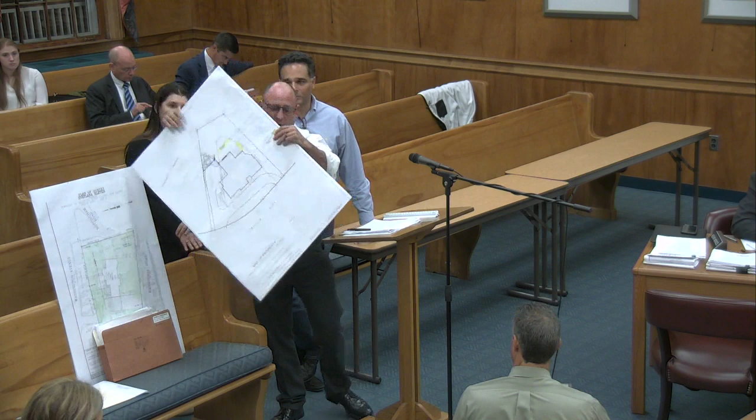So what's the project? Currently, there's a 1,255 square foot deck on the rear of the property. I'll mark these as exhibits, let's just get into it. These are photographs that I took, they accurately depict the site as they are today. Mark it A1. Oh, no Dan, we need your qualifications first. Okay, yeah, sorry.

I'm a licensed architect in the state of New Jersey. I was licensed in 2001, and my license is current and in good effect. I practice residential architecture primarily in Essex County, and I've appeared before this board.

Have you appeared before any other boards? Yes, Union and Essex County. Is your license in good standing? Still good. Your qualifications as an architect are accepted by this board.

So the photo with the tax map is going to be A1 - yeah, this is a Zillow map, but we'll go A1. That's a Zillow map, that's not the tax map? No, I have a tax map, but that's Zillow.

So what are we looking at? Basically, we have a 1,200 square foot deck that we want to take down and make smaller, about 900 square feet - over 300 square feet less than exists - but we want to make it a raised patio. Then underneath the patio, we want garages, because it's a good use of space. Given the topography of the site, he currently has 2 garages under the house, so this will create a 3rd garage under the patio.

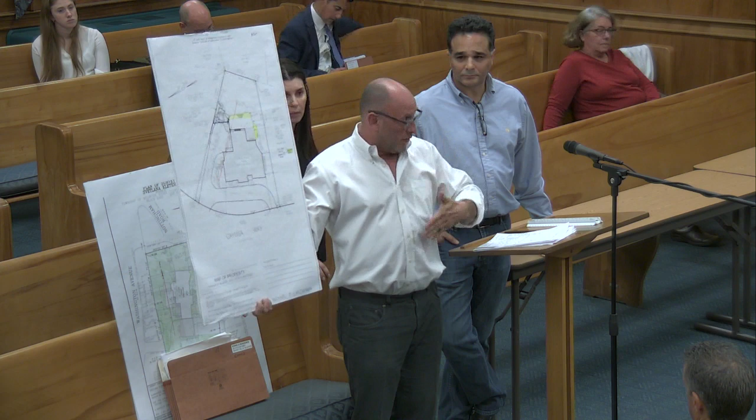First one is for a side-facing garage setback. In the R4 zone, they require 28 feet from the property line to the face of the garage. But because of the shape of the property line, we're 24.6 feet away. If you draw a line from the corner perpendicular to the lot line, that's 24.6 feet. If you draw a line straight across, which is not how we measure it, that's 28 feet. And of course, the garage doors are on the corner.

I calculated that if we were 3 feet from the corner, and I draw this horizontal line, we're at 30 feet, so we're not concerned. Obviously we're creating a third-car garage, not the primary garage, so if it's a little awkward to get to, they're comfortable with that. So that's the first variance, and it's a violation of 3.35 feet.

Combined side yard setback - I have a purple line here that shows the combined side yard setback, which is a function of the width of the property. So we're a bit penalized because of the shape of the lot. It's existing non-conforming. Existing is 32.8%, you need 35%. So that's existing, and proposed is 29.8. Obviously it's a function of the shape of the property.

Third variance, rear yard. Why is that variance increasing? It's increasing - well, it's existing, but it's an accessory structure. Now that I make it a building, it becomes a principal building. So yes, but we didn't push it any closer.

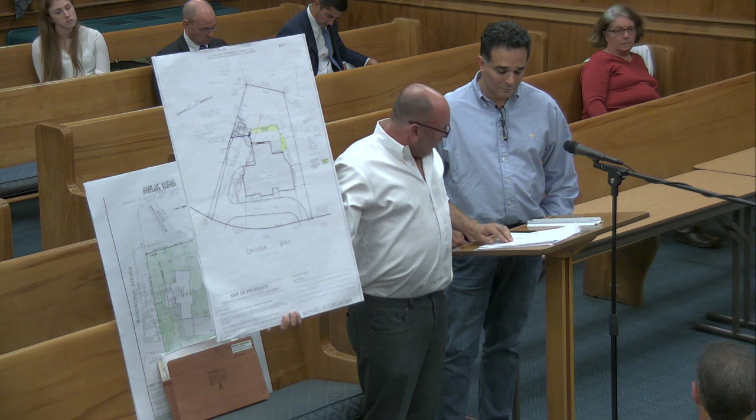Fourth variance, building coverage. The house is existing at 20%, your max allowed is 14%. The existing house is at 20, we're proposing 23.8%. It's 2,000 square feet over what's allowed. So when you look at the deviation, it's scary - it's 70% deviation, but the house is already at almost 46% deviation. We're adding about 650 square feet of building coverage.

But you won't see it, you won't feel it, there's so many positives about this, and we haven't talked yet about the architecture. There's no attic, so the storage would be great. Obviously, it's a third car garage, amazing. But the net result is so much nicer and better for the Daniels, better for the neighborhood. That's a big number if you just stare at the percentages, but if you look at the overall effect, it's a benefit in my mind.

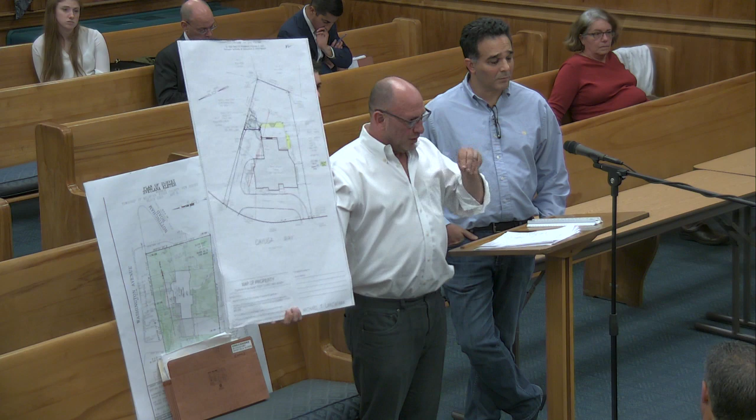You'll see some of the building coverage in the one-story addition. That doesn't change, because if I build underneath it, it's building coverage. So the only difference would be if I get the FAR on top of it, because the deck wraps around the house.

And thought this - oh, I apologize, there's already, underneath this deck, already a garage. So it's already being counted as building. Oh okay, I forgot that.

Fifth variance, lot coverage. We're existing non-conforming, you're supposed to be at 35%. The existing house is at 53.6. As a result of approval, we'd be lowering the lot coverage - we'd be lowering it 350 square feet less than what exists. Still a variance, but we're making it better.

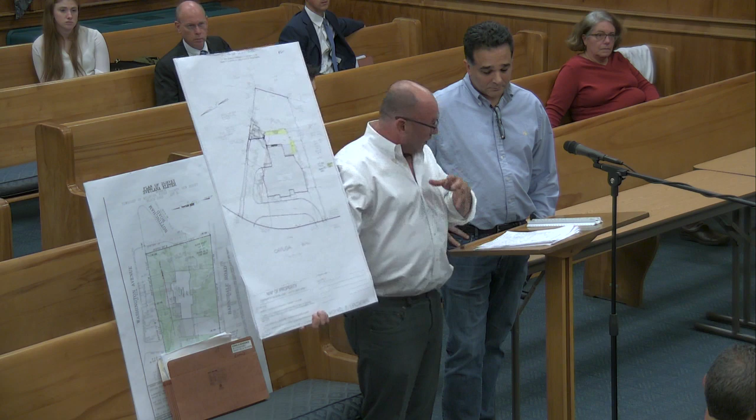So positive. And finally, FAR. If allowed to do this 15 by 17 one-story addition in the corner that sits nestled here, we'd be a 5% deviation from what's allowed. So the existing house is not conforming by 20 square feet, and we'll be seeking an additional 250. Again, there's no adjacent neighbors - it's one-story, won't block anyone's light and air space, but will allow them a little extra space in their master bedroom suite.

Those are the 6 variances. Just to recap, the shape of the lot triggers a lot of the variances, which squeezes the backyard. Aesthetically, it's going to be more compatible with the existing architecture, and I think it's going to be more pleasing, certainly for the Daniels and anybody else who has an opportunity to see this project. In terms of FAR, I think where it's placed, the massing, only the Daniels will get the benefit of it, and there'll be no detriment from that.

That's our application. Did I miss anything? What's the existing floor area ratio? Existing FAR is 26.1%, and we're proposing 27.3.

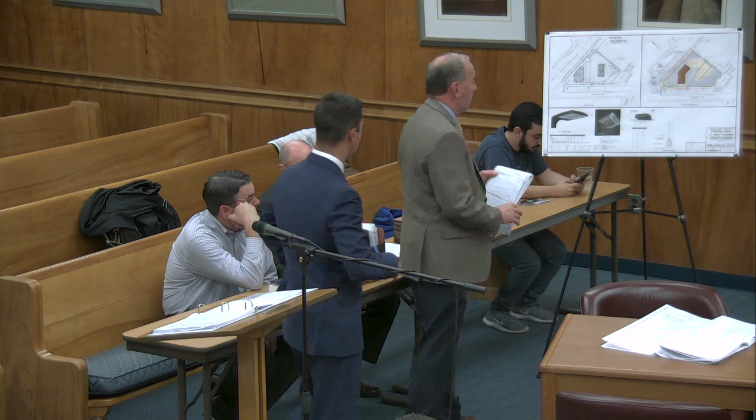Which sheet is that of yours? It's sheet 4. The reason I've taken that plan is it shows the existing survey conditions of the site. It is identical to the one we have except for its color. Fine, let's mark it A1.

Just for orientation, the existing site is located at the southeast corner of Vauxhall Road and Millburn Avenue. Vauxhall Road is running horizontal on the plan sheet, and Millburn Avenue is running diagonally toward the top right corner of the plan.

The property has been colored for identification. The existing concrete sidewalk and the concrete on the site itself is colored in beige. There are brick paver areas along the sidewalks, colored in a peach color. The dark brown is the existing Canopy gas station located on the site, which is the existing orientation of the site.

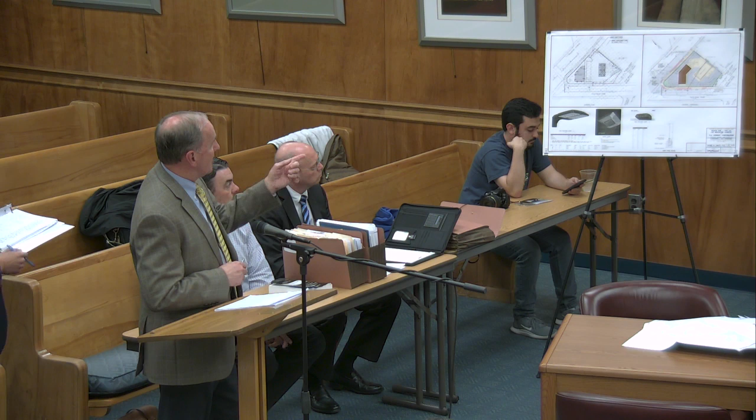The existing use of the property is a closed gas service station. The beige area in the center of the property is the foundation of the prior service station. There was a fire, I believe in November 2009, that burned the building, and the only remnant of the old building right now is the foundation which presently exists on the site.

Also, the existing canopy is irregularly shaped, but underneath that canopy are 3 fueling pumps with 6 fueling positions, so there are currently 6 fueling positions on the site. In the northeasterly corner of the site, there are 3 underground storage tanks located under a concrete pad, which are proposed to remain.

There are 2 existing driveways, one each on Vauxhall Road and Millburn Avenue, that access the existing property. The site is almost 100% paved, with existing coverage at 92.2%. There are just small islands right at the intersection of the 2 streets, plus a small green area along the brook.

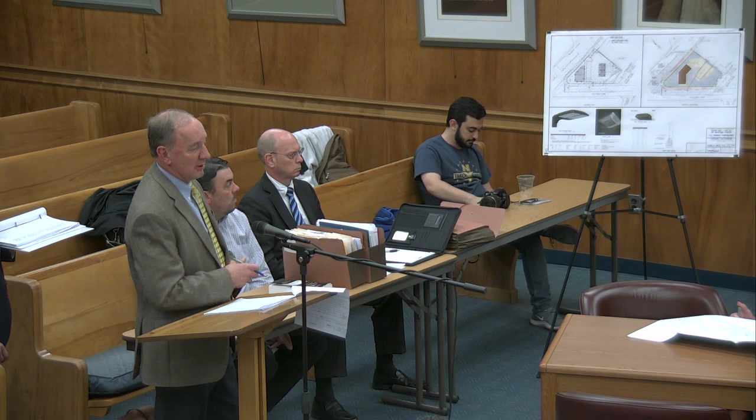This was an undeveloped site where it would be completely vegetated. That riparian buffer would be restricted from development. In this case, the riparian buffer today is almost 100% paved, with just a small strip along the banks of the brook itself. What we're going to be doing is redeveloping that riparian area, which will also require a permit from DEP.

Several things specific to this site: in July 1996, the Zoning Board of Adjustment resolution granted an auto service station, and it also determined that the site was continually used since 1930 as a service station. So we are proposing a similar use in terms of the gas station use, which would be consistent with that approval.

In 1970, there was an additional zoning board of adjustment application for the new building constructed at the site. In 1996, there was a zoning board approval for the current use of the property, even though it's closed at this point in time, which granted the use for the service station and canopies on the site.

What we're proposing to do is shown on sheet 2 of 7 of the site plans, an identical copy, except this has been colored for identification. We'll mark it as A2. This is the exact plan that's been submitted, colored for identification.

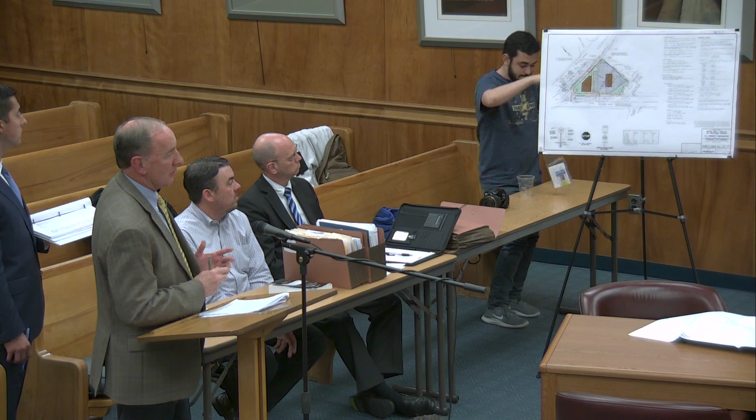This plan has the same orientation as the previous plan. Vauxhall Road runs horizontally across the middle, and Millburn Avenue is angled towards the upper right of the sheet. The proposed sidewalk areas are colored beige, and the landscape areas we're proposing are colored green or light green. The only other beige on the right-hand side of the site is the trash collection area. That's basically what's being proposed and how it's colored.

The proposed building is located at the intersection of two roads. It has a front yard setback from Vauxhall Road we're proposing of 8 feet, and a proposed front yard setback from Millburn Avenue of 8 feet as well. How many feet? 8 feet on each, 8 feet setback.

The proposed building will have a square footage of 1,820 square feet, and it will be 1 story in height. The elevation of the building, because of the flood hazard area, is going to be located above the flood hazard elevation itself. The whole building will be elevated.

It'll be built on piers, and it'll allow the floodwaters to flow under the building. Once you hear from the architect, he'll describe how he's putting screening around the building to give it the appearance that it's one continuous structure built to the ground level, but it's designed in a fashion to allow floodwaters to flow underneath the building itself.

The access to the site is going to be from a single driveway on Vauxhall Road and a single driveway from Millburn Avenue. The driveways in both locations are as far from the intersection as we possibly can create on the site, and they're both dual entrance, dual access driveways. So you'll be able to enter and exit from both driveways.

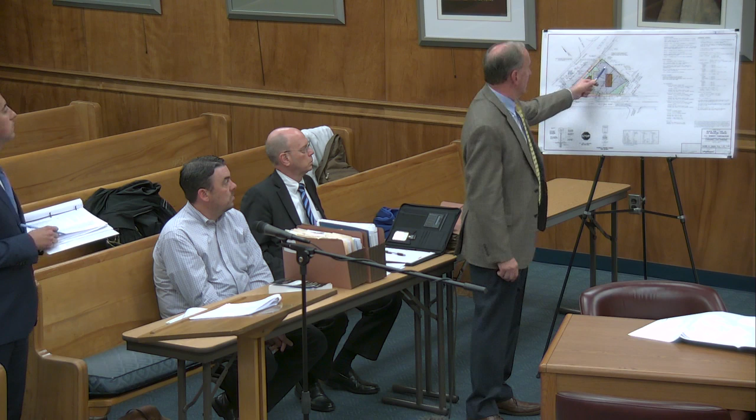Vehicle access into the site will be provided both from Vauxhall Road and from Millburn Avenue, the same for truck traffic entering the site itself. We anticipate that the truck traffic for the site, for the fueling positions, the tanks are located in the northerly portion of the site, closer towards Millburn Avenue. Those 3 tanks are proposed to remain.

The fueling truck will enter the site from Vauxhall Road. It'll be able to swing through the site on the westerly side of the canopy, stop over the tanks, drop its fuel, and be able to exit the site going either east or west along Millburn Avenue. So the site is designed so that the tractor trailers will be able to enter and exit the site without impacting any of the other traffic movements on Millburn Avenue or Vauxhall Road.

In terms of smaller truck traffic, we're anticipating that if it was coming from Vauxhall Road, they would turn right at the traffic light, enter in from Millburn Avenue, come in on the easterly property line between the canopy and the trash collection area. They'll be able to come around the pump island, come out towards the Vauxhall Road driveway, and back into the loading space to take their goods out. They'd bring them over to the building itself, and once they're done, they'd be able to leave the site without impacting the operation of the site itself.